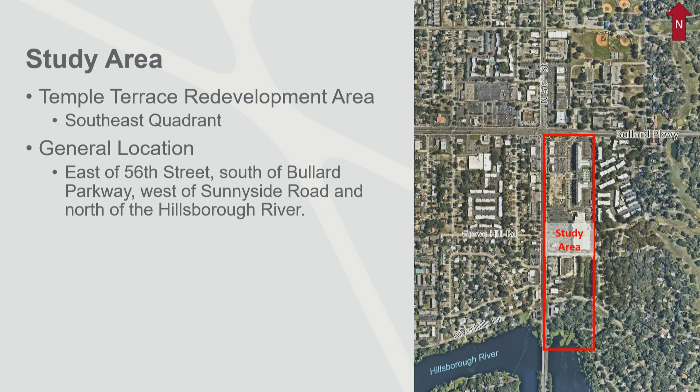Not to reiterate too much of what Greg already introduced, but the main goal of the project is to develop pedestrian concepts to improve pedestrian flow and connectivity, enhance walkability throughout the site, as well as add some improvements and amenities to the Springdale Pond outflow area.

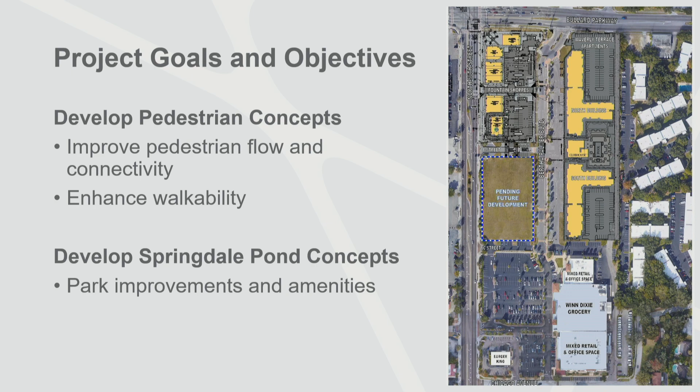Some project updates. So we officially kicked off the project last November with city staff, and since then we've had a couple coordination meetings to develop the concepts and kind of clean them up and work through them to get to the concepts that you'll see in a few slides here. And we've also met with a couple stakeholders in the southeast quadrant to get their initial feedback on our draft concepts before we move forward with finalizing them.

The draft concepts, we really started by going out to the site and evaluating some opportunities and constraints that are currently out there today in order to understand existing conditions. And then we took that and started developing the pedestrian concepts you'll see soon, along with those placemaking concepts around the pond. And then, based on our initial concepts, we've also developed some planning level budget estimates for the plan.

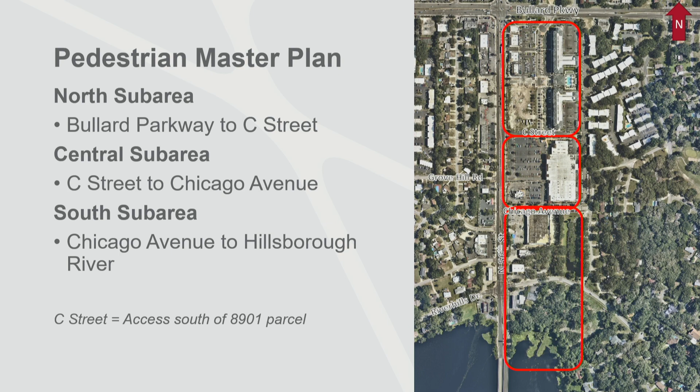Before we dive into the specifics of the concepts, for the purposes of the master plan, we divided the study area into three sub-areas. As you'll see on the map there, the north sub-area, which is generally the area between Bullard Parkway and C Street. If you're not too familiar, C Street is the access into the shopping center plaza just south of the 8901 parcel. Then the central sub-area, which is essentially the entire Winn-Dixie parcel in the middle of the site. And then we have the south sub-area, which is the portion of the site from Chicago south down to the river.

So getting into the concepts, starting with the north sub-area, this slide here just shows some example inspirational images, if you will, of what we're intending to accomplish with the improvements in that portion of the site. And those improvements include intersection improvements, the enhancement of some parallel parking to use it for some flex space, which I'll get into in the next slide, widened sidewalks, a gateway space, and landscape planters.

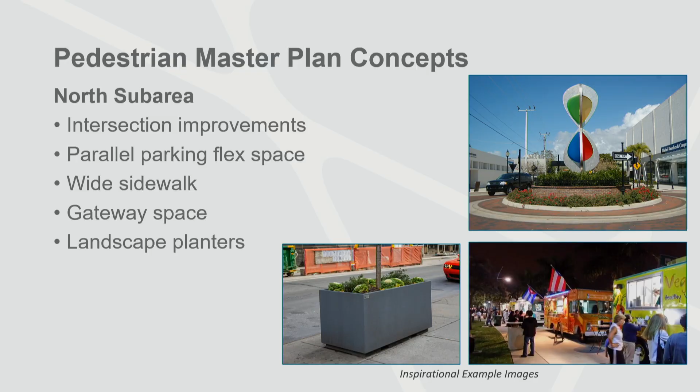For the purposes of sharing these in presentation mode, the concept is split into two, so there'll be two slides for the north sub area.

The main improvement in this area, knowing that the site has been recently developed with the construction of the Waverly Apartments as well as the Fountain Shoppes, is really reconfiguring Bertha Palmer Boulevard. Currently there's parallel parking on the east side and west side of that roadway, and the recommended concept is to convert the parallel parking on the east side to a widened sidewalk to enhance pedestrian flow and connectivity, while keeping parallel parking on the west side, but also using it for flex space, say in the event of a market or food truck rally, having a dedicated space for those activities.

In addition to that recommended improvement, we have also recommended adding sharrows or painted lane markings to the roadway to indicate to vehicles traveling along Bertha Palmer that bicyclists are also present and using the roadway, providing that multimodal element to that portion of the site. Some other smaller improvements include landscape planters along the sidewalk on 56th Street to tie in that edge of the site into the main areas there.

This is the southern half of the northern sub area. As you can see, that widened sidewalk continues down to C Street. The flex space also continues down to C Street, in addition to some sidewalk enhancements and a gateway space feature.

Getting into the central sub area, here are some inspirational images of what we're intending to accomplish. The focus here is on how to create more space for pedestrians, particularly in front of the shopping center. Our recommended improvements include a widened pedestrian area, which requires reconfiguring the parking and drive aisles in front of the Winn-Dixie and shopping center, as well as the addition of some pocket park amenities such as seating and dining. It's important to note that for this central sub area, we worked with staff and initially developed three concepts, and in working with staff we chose the third option, option C, as the preferred option to proceed forward with.

Before we dive into option C, here's an overview of the other two options we put together and discussed with staff. Option A, on the left-hand side, doesn't change the pedestrian area in front of Winn-Dixie too much. It would be what's existing today, but maybe replacing some of the existing concrete with pavers, the same design feel that's in the north and south, continued all the way through, including those pocket park elements such as benches and dining in the northern and southern corners of the shopping center, as you can see in the circles.

Option B differs from option A in that we took that pedestrian walkway, instead of keeping it in front of the Winn-Dixie shopping center, and moved it over to the west side of the drive aisle with a widened, pavered area for pedestrians. We felt this option introduced a lot of opportunities for conflicts between pedestrians and vehicles traveling in and out accessing the Winn-Dixie, so we decided not to move forward with that one.

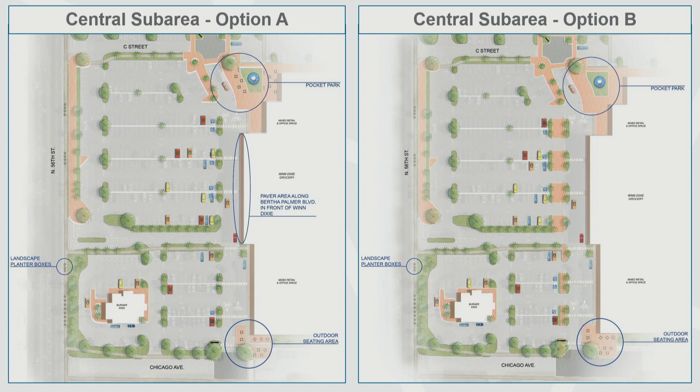And then lastly, getting into the south sub area, this is where you'll see a lot of amenities around the Springdale pond and outfall area to really enhance it, making it a community amenity and an area for people to recreate either passively or actively. Those improvements include some intersection improvements to enhance crossings between different portions of the site, as well as park amenities featuring a multi-use trail, fitness area, picnic area, and gazebo area.

You'll see on this slide the locations of those recommended improvements. Starting at the north end of this area on Chicago Ave, the recommendation for a raised intersection on Chicago Ave is twofold: one, to enhance pedestrians crossing from central to the southern portion of the site, but also as a traffic calming element to slow down vehicles and make them aware of pedestrians as they're traversing along Chicago Avenue, understanding that it is very highly trafficked in that area of the site.

Moving further along around the pond, you'll see the gazebo area, which is intended to be kind of an entrance into the space, as well as the inclusion of a picnic and dining area in proximity to the Enigma redevelopment, understanding that it's a multi-use redevelopment with dining and retail space, so people using that area can also use the park and vice versa.

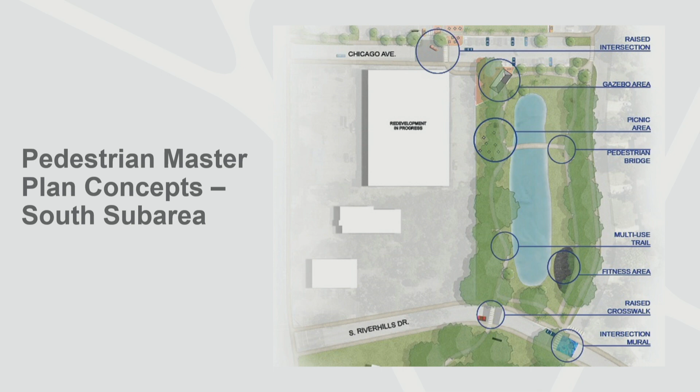The addition of the multi-use trail around the outfall pond, as well as the addition of a fitness area in the southeast corner, connecting to the final southernmost portion of the site.

That's where those intersection improvements come in on South Riverhills Drive, enhancing the raised crosswalk that's already there to create safer crossing opportunities for pedestrians and bicyclists traveling between the two areas of the site, as well as an intersection mural or other improvements to the intersection just east there.

Not too much change within Riverside Park itself, but building on the existing sidewalk network to really activate that river space, whether it be a continued trail or potential boardwalk along the water, taking that trail system through the park over to Riverhills Drive. I believe there's a sidewalk that connects down to Riverhills Park.

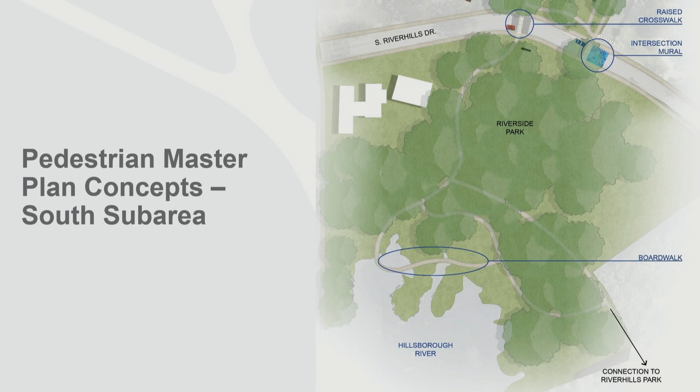So with that, we took our initial draft concepts and started to get an idea of what this will cost to implement, understanding the concepts are still at a planning level and would still need to go through design and engineering. The total for all improvements across the site is estimated to be $3,800,000.

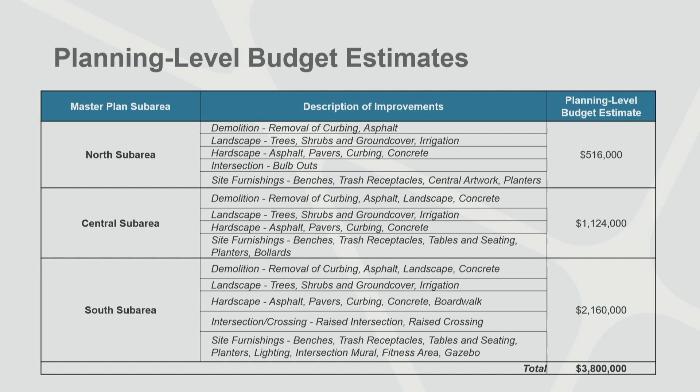And then lastly, to wrap up the presentation before we open it up for questions, some highlights on the project timeframe: wrapping up the project this spring.

In order to do that, we'll finalize our concepts based on any feedback we receive today or from additional stakeholder outreach. We'll also develop some street view perspective renderings, in addition to the ones you saw on the slides, to illustrate how the site will feel with the improvements to a pedestrian walking at street level.

We'll finalize the master plan document and present it publicly in a to-be-determined format, but it will be shared. With that, thank you for your time. That's all I have on the presentation, and we'll open it up for questions.

Thank you. I'm sure we have some questions, but just to clarify my understanding of expectations for tonight: I know we have a goal-setting meeting coming up to discuss funding, budget priorities, available funds and revenue streams. Tonight, if I understand correctly, is primarily for us to get this information and ask clarifying questions about the design, not so much to discuss approval of next steps. Is that where we are with this?

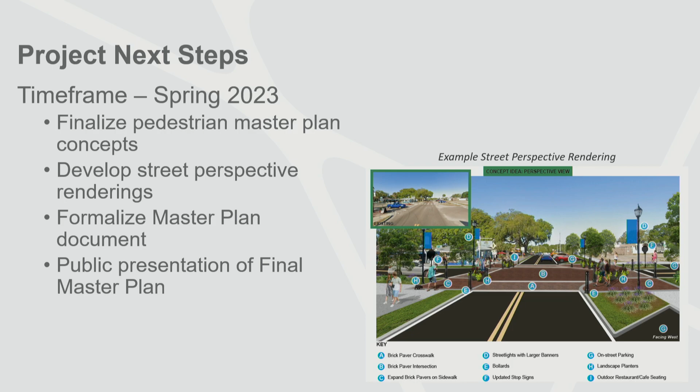Can you put that graphic back up? Because I'm not real clear when we're talking about moving the entrance. I'd like to take a look at that. I hope I got it right. Okay, at the very top, yeah, go ahead.

Oh, relocated access, yes. So the access, at the very northern on C Street, that drive aisle access, it's currently more to the west, and we're just proposing shifting it east to align with the drive aisles. If you're familiar with the northern portion, there's already... I understand, right now from Bertha Palmer Boulevard you can drive all the way down. Right, you would still be able to. There's some curves, but you don't have to make a hard right or hard left.

Right, and this would traffic calm that too, and still move the traffic away so the pedestrians can be near the building. I got you, right, yeah.

So you'd still be able to go north to south on Bertha Palmer, but it would be reconfigured slightly to the east.

Thank you. I think, Corinne, what we were projecting was 15, 20 spaces lost, which is kind of what we saw with the reconfiguration. I see, thank you, yes.

Councilmembers? This is more for Mr. Pauly. How much interaction has city staff had on this project thus far in the discussions?

A lot. Yes, a lot. We've had multiple meetings, telephone calls. The city manager and myself have personally met with the most impacted stakeholder in the area to discuss the project. Corinne and her team have then followed up and met with them.

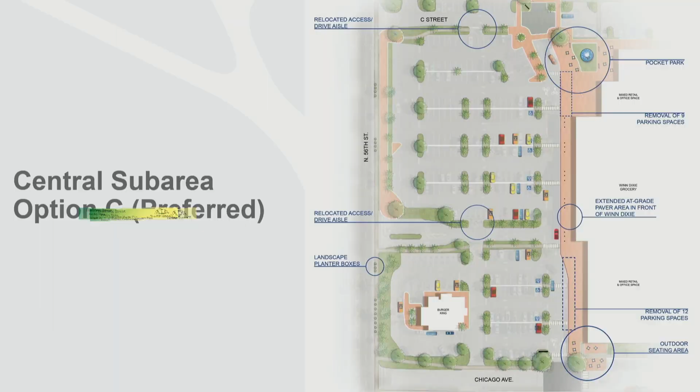All right, okay, thank you. Councilmember Abel? My questions have already been addressed. Could you put the sub-area A north back up, please? Sure.

Okay, and so while not probably optimal, it is feasible to do the north portion of the project and the south portion of the project, and phase in the middle portion, which is obviously the most problematic portion.

Right, and as part, because those are both city-owned properties, correct, those are easy. Well, expensive, but yeah, easy. The middle one is the sticky one, correct?

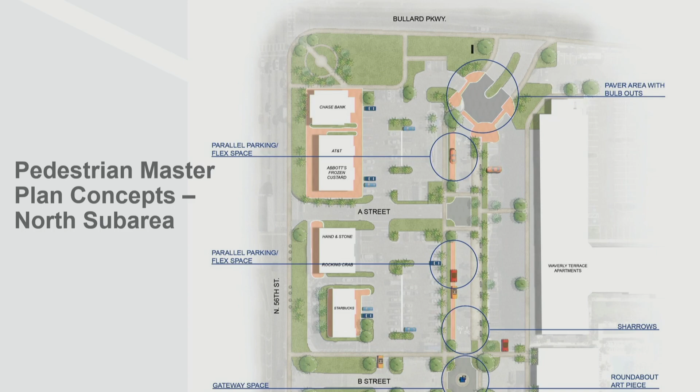Correct, and I think that's the goal and intention of this master plan, to have a vision for this area as it continues to redevelop and change, knowing that in the short term you can accomplish some of those quick wins in the north and southern areas, and then that central area may just take longer depending on what happens with that site over time.

I mean, we're speculating at this point, but there could be some added motivation if we've built out the north, both sides of this business, and it looks beautiful, and now the one that doesn't is right there. There may be some more incentive once you build the other two sides to get more meaningful negotiations with the owners of the middle piece.

Okay, other questions? And obviously, during our goal-setting meeting, we're going to have some robust discussions about where do we want to go with this, and how much money is there, and that kind of stuff.

Very good, and no more questions, I'll let Corinne's presentation, thank you. Yes, thank you very much. We've been eagerly awaiting this, so thank you very much to your team. It's definitely an exciting project. I think I've nagged you a few times, so thank you.

Thank you. Mr. Pauly, anything else for the CRA board? No, sir, if you have any questions of me, I'm certainly available, but that's all we have to present to you tonight.

Well, I'm sure we're going to have some robust discussion at our goal setting. Certainly. In fact, we may decide to work through some of the other things first and save this for last or something, because I know there's a lot to talk about here. Absolutely. Very good, sir, thank you very much.